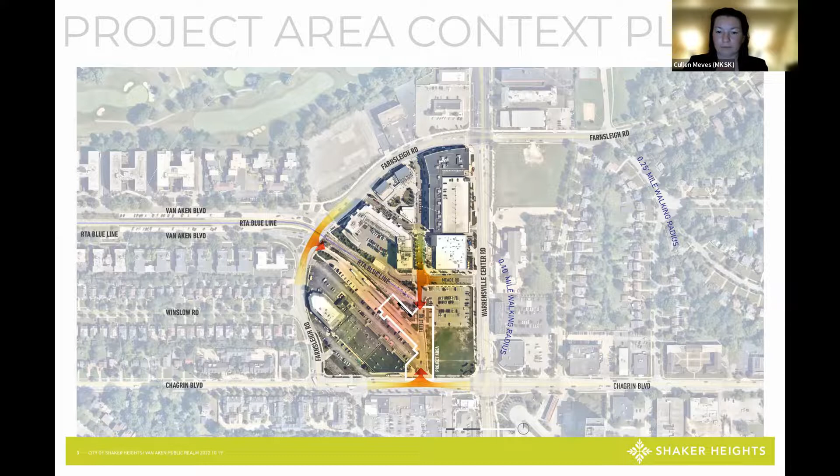So back in 2020, right at the beginning, in the middle of the pandemic, we learned pretty quickly how to use Zoom and coordinate to come up with a plan to address that, sort of as the precursor to what we're looking at today. At that time, we came up with the idea of looking at where the future development was going to be, which is off to the sides with the pinkish cast to it. And this area was divided into 7 different areas.

As we moved through with the project, we also worked very closely. Our team consisted of city employees, our consultant, as well as the owners of the Van Aken shopping area, RMS, and also RTA, of course, is a critical component of that whole area. So we really worked as a team to narrow down what we wanted to happen. And for this project, in effect, what we're looking at is the areas that are labeled as 1, 2, 3, and 4.

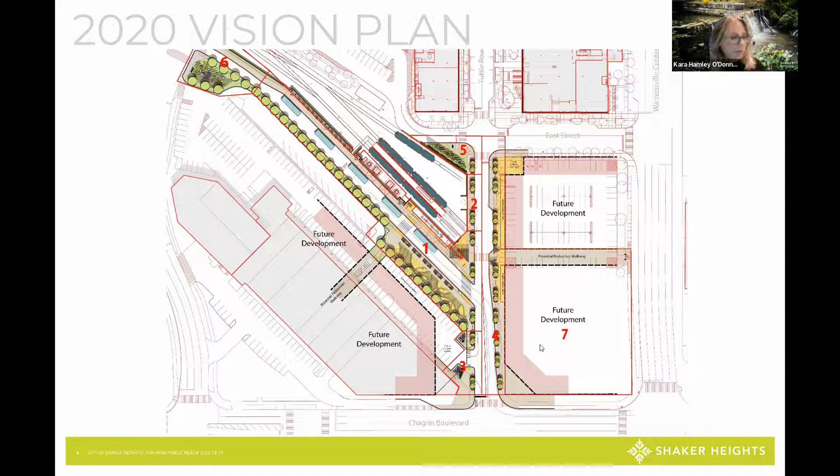Possibly 5, but mostly those core areas in the middle. And then I'm going to pass it off to Joyce to talk a little bit about the RTA project that's separate from this, but obviously very related to it.

So we did want to show you what's going on with the RTA Comfort Station. They are in final construction drawings, and that is to add a station building with a restroom at the end of the tracks, where it says Comfort Station is green. So we wanted to let you know that that project is also going on.

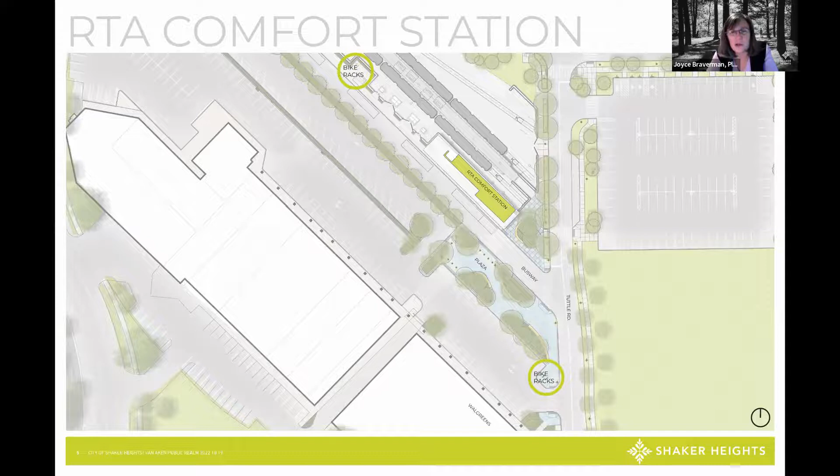RTA, as we said, are in their final construction drawings and hope to bid this by early next year, and perhaps start construction as early as March or April. The public realm construction would follow right after. So just wanted to let you know that's going on and give you a visual of what that will look like.

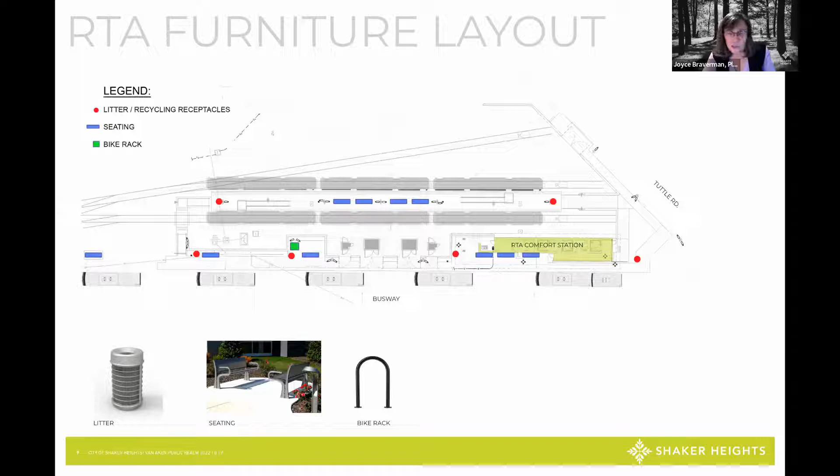Oh, and this is their furniture, just to show where you see blue, that's both the shelters with benches in them. Red is trash cans, and green is bike parking. The reason we're showing you this is we will talk about bike parking on our plaza, so we want to show you what's happening across the street.

I'm just going to give you a little bit of background. This is a $1.8 million project. Most of that is with NOACA Transportation Alternatives, which focuses on transportation alternatives that aren't a car, such as pedestrians, cyclists, and transit riders. That money is secured and ready to go.

Our timeline, as Joyce started to allude to, is that we're working on design and engineering for about the next year. Then in late next year and into early 2024, we'll be doing bidding and construction, which will take place from the spring of '24 to the spring of 2025.

And I'm going to pass it back over to MKSK to get us going on the fun part. So just to give a quick overall view of what we started with and what were some of the goals of the project as we developed the space.

This is a major hub within the district, tying together the rail, busway, and pedestrian traffic. So connectivity was a major theme of how we started to lay out the space and organize it around the desire lines that people have moving through the space, creating a multimodal district hub that really becomes the heart of that.

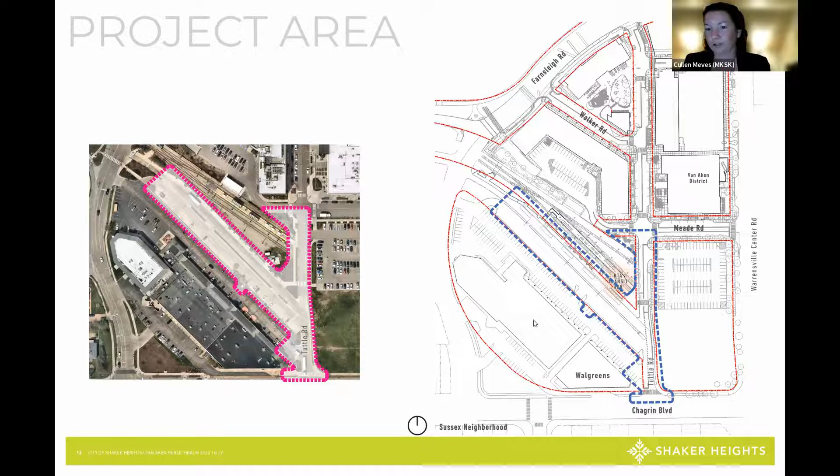As we mentioned, connectivity was a big theme for us, trying to figure out how this plaza and space could best function. We looked at various modes and circulation routes happening in and around the space, whether it be the bus and rail circulation, the bus lane with multiple routes coming in and parking along the comfort station, the rail line, and how people are disembarking and moving through the space, getting to their cars or moving through to the district, how vehicles are entering the space.

This was of particular interest to us also from a wayfinding and branding perspective, trying to create moments that will help ground this area of the district, similar to how the hubs at the northern end have done. We also looked at the circulation as it exists today within the parking lot and tried to make some improvements to that. And finally, pedestrian flows.

You can see here there's a number of crosswalks that exist today, desire lines for pedestrians moving through the space. As we were in discussions with the surrounding owners and with the city, we identified this major desire line cutting through right adjacent to the Walgreens.

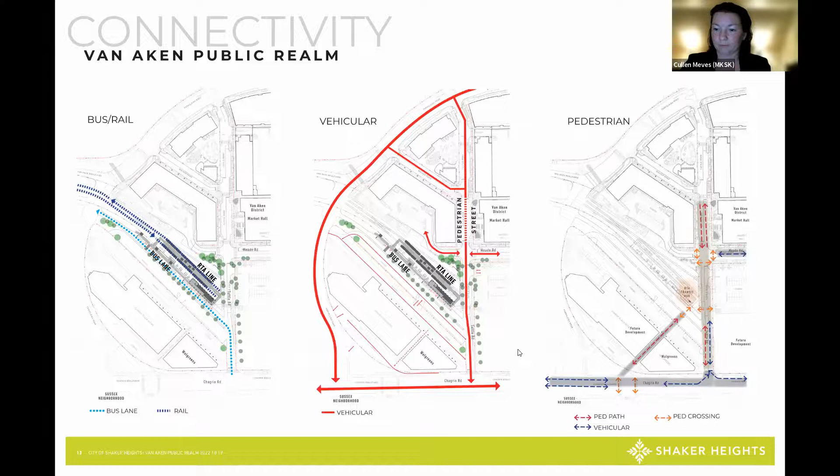And so being cognizant of that, we tried to create that connection as well. We also wanted to make sure the balance was right for the space, taking a look at the major public spaces throughout the district and creating a space that balances those but doesn't necessarily draw away from them. Each of these spaces has its own unique character and function, and similarly this one is really more tied to the transit hub and circulation aspects of the district.

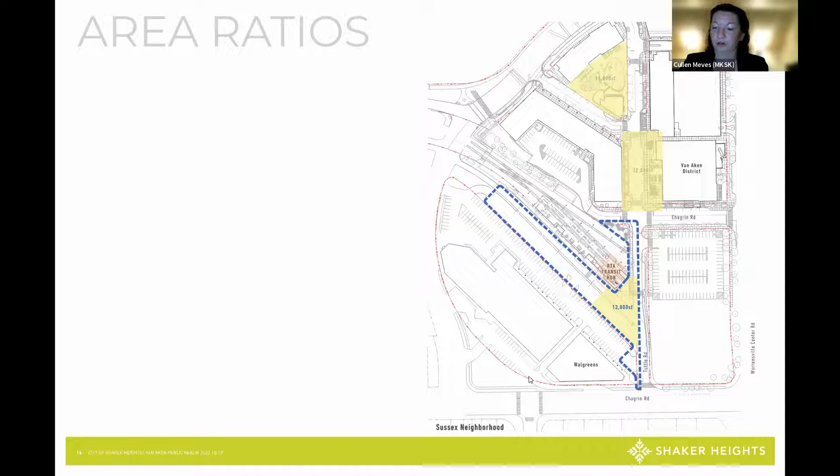And we're trying to draw that into the design and make it function from that perspective as well. As we've been moving through this process, we've had a lot of discussions trying to figure out the framework, how to lay out the space. As we mentioned, that major pedestrian connection to the Sussex neighborhood and across Chagrin is a strong desire line and cut through.

So we wanted to provide an ease of movement through the space along that corridor in particular. That kind of set up our boundary as we started to figure out the best scale for this space and how it will function. We really see it as a quieter plaza compared to the northern two, a space where people will be waiting between route stops or waiting for a bus, perhaps waiting to meet someone who's using one of the adjacent shops.

And so trying to size it appropriately for that. As we were doing that, we also started looking at maximizing the efficiency of the parking that's already there, switching what is today a two-way parking area into a one-way that gets a little more space, and changing it to angled parking so that we can have a few more parking spaces in that area as well. And then also looking at all of those other cross connections happening throughout the district.

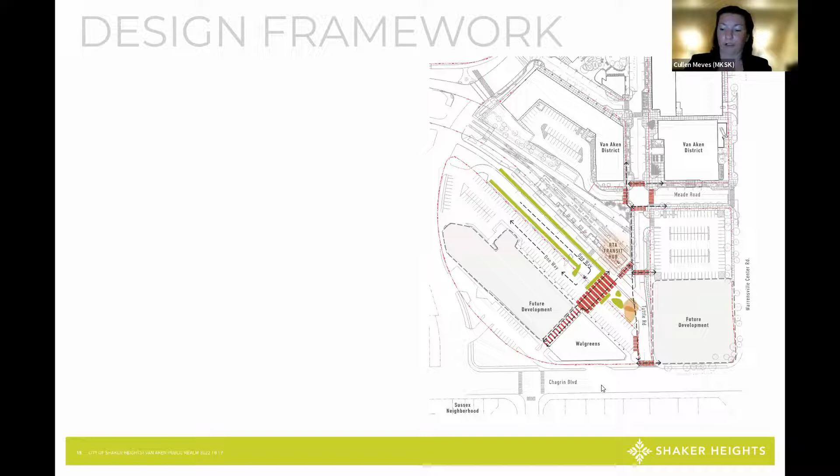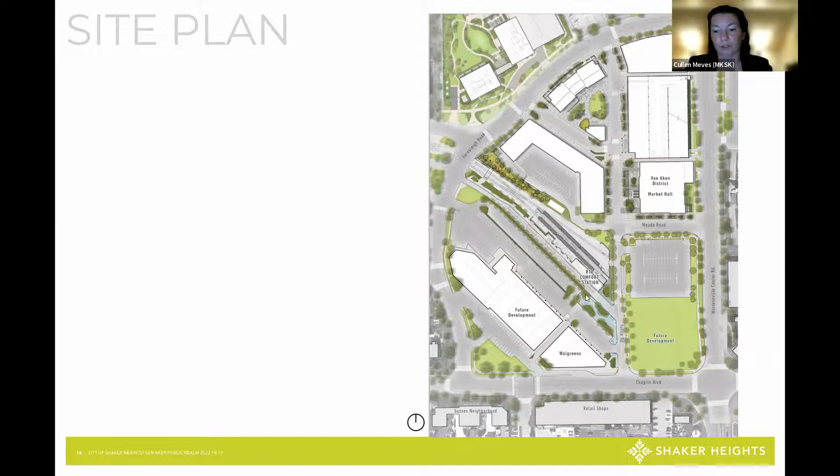So here you can see, as it stands today, the site plan for the area, and also how it ties in with the other spaces throughout and along Tuttle Road. You can see that long connection right next to Walgreens coming up and into the space. Let's zoom in a little closer so you can see some of that framework playing out in the design.

So we're showing a generous crosswalk that brings people from that primary crossing point into the plaza. We also studied paths and routes, trying to make a space that is comfortable, that creates enough shade and has enough areas for seating, and different types of places with different vantage points, but also without blocking any of those primary routes that people are trying to take.

You can also see right here that driveway that's now been switched to a one-way with the protection areas at the end right next to the crosswalk, creating protection along that side as well.

You can see over here our concept diagram of how this plaza is functioning, tying into the idea of having the artist piece as a primary component of the space. We're designing the framework for the space itself, and the artists are designing the element that's going to be proposed for this space.

So we're keeping this area in particular flexible so that they can be seamlessly melded together and not be an afterthought in terms of the space as it's designed.

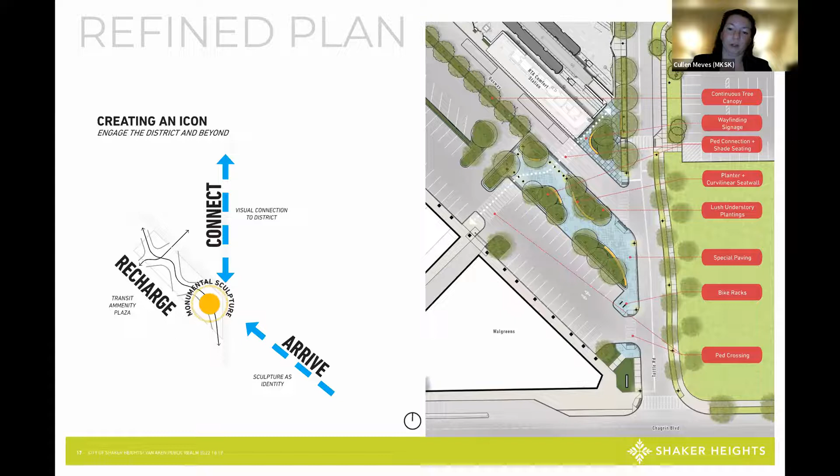Making really safe, generous crossings that buses will be cognizant of, with everyone crossing here - we're suggesting tabled crossings so it creates a very prioritized pedestrian experience. It also highlights the primary route and gets you in the most direct way onto a bus route or rail stop up to the northern part of the district.

You can see we have a number of planters to help bring down the scale of the plaza to a pedestrian scale. It's curvilinear for ease of movement throughout the space, with lush understory plantings.

And we have some specialty paving, which you'll see an example of, trying to pull in some of the character of the iconic paving up in the northern section, but give it its own flavor and make it a little bit more of a gradient here.

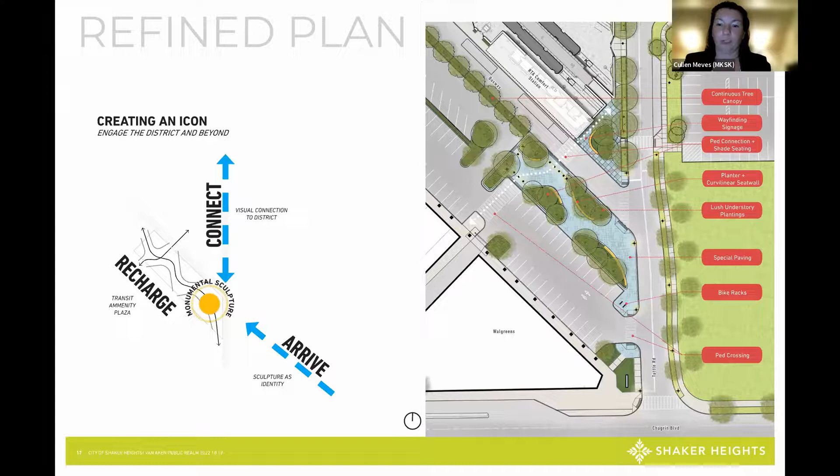And finally, as was mentioned earlier, the bike racks tie into that multimodal and connective design goals, so trying to make sure everyone has an option here within this plaza.

Some of the design elements we're proposing for this space include seating, specialty pavers, shade trees, and understory planting. We're drawing inspiration and association from the comfort station across the street.

We're trying to bring in some wood elements into the benches, also creating areas that are a little bit more comfortable, not quite so cold to sit on.

The concrete pavers are just a nice material - it gives a distinction, a feeling of it being a special plaza in space.

And as I've mentioned a couple of times now, the shade trees are really important to the comfort level in this plaza, making sure it's a nice place to be throughout the seasons.

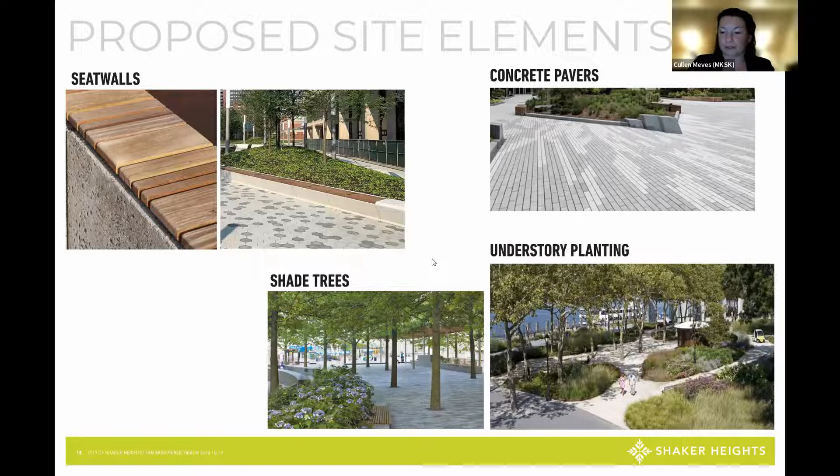Some of the other proposed site elements, and also ones that will be in close proximity - we're proposing to keep the same lighting that exists within the district, keeping that consistent character and tying everything together.

Suggestions for bollards at those crossings so we can provide wide crossings that are easy to negotiate, but also still keep cars where they need to be and people safe from vehicular zones.

And then bike racks as kind of the standard for the district itself, and the RTA's fixtures that will be across the street. You can see that here, the benches and the trash can that's shown in the previous plan.

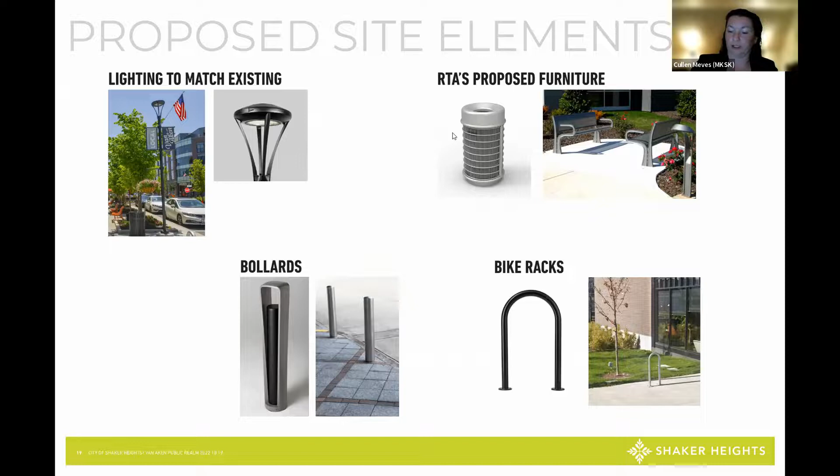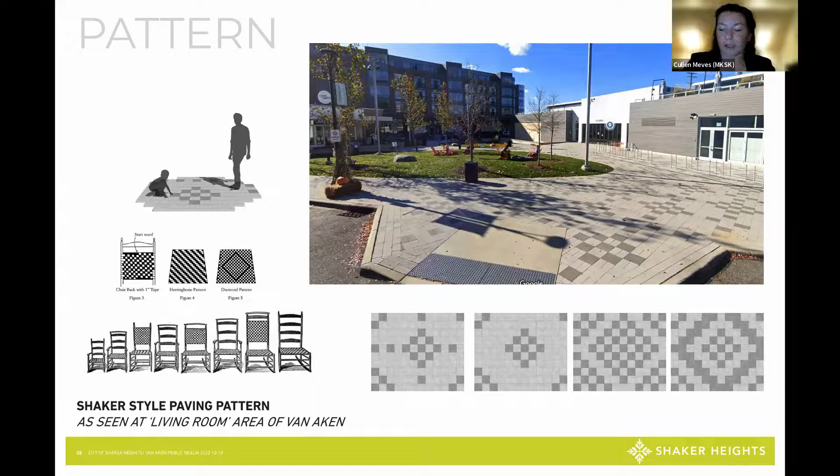And as I alluded to, the specialty paving happening up in the center of the district - we want to keep that area special, that is iconic. So the proposal here is to use a kind of broken down version of it, make it into more of a gradient form, have a sense of energy as you move through the space. So it ties together, but keeps this area the central socializing space and its identity that way.

Some other elements we're considering or planning for in this space, so that it can be flexible, are mobility elements—either bike stations for bike shares that may be located in this area in the future, and also wayfinding signage that may be associated with RTA. So some other elements we're considering as we're moving forward.

Also some suggestions of potentially having thermoplastic or colorful treatments on the crosswalks—really eye-catching or iconic elements that can be added at any of the crossings as they exist, but tend to be used more for gateways.

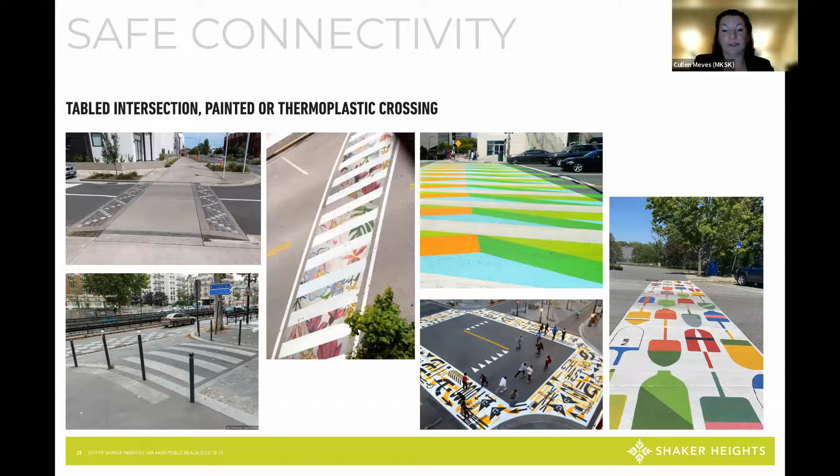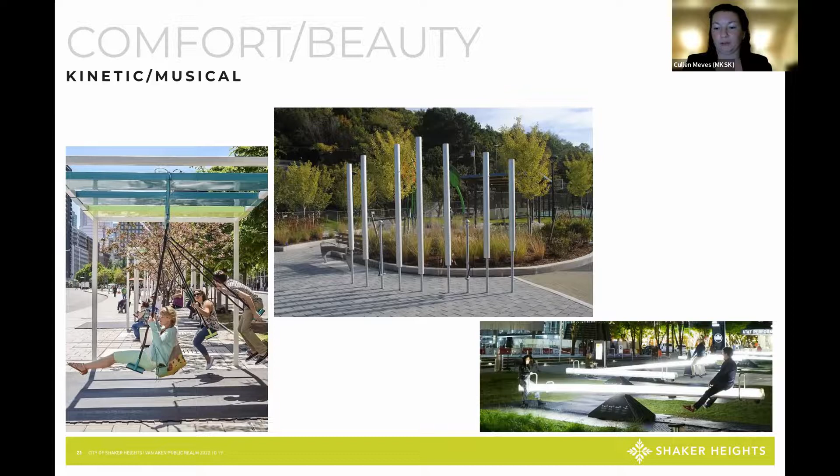And so, sure, go ahead.

Thanks, Cullen. This is a preliminary design that was vetted just last night by our public art task force. The artists chosen through our public art task force several months ago are a group called Kravanek and Bro, and they came up with multiple general schematic ideas for the artwork, which last night our public art task force unanimously preferred this concept. Throughout the process in the last couple months and going forward, MKSK and Kravanek and Bro will continue to work together, as Cullen noted, to make sure these are seamlessly integrated into the design and that this can be a real anchor in that public area. We're excited about it, and I think MKSK and Kravanek and Bro have been a great partnership—their creativity together. We're really looking forward to seeing what becomes of this. I'll hand it back to you, Cullen.

So this is exactly that kind of target that we had on our previous diagram—this is the placeholder we were referencing. So creating a space for something vibrant and exciting that helps people understand when they've arrived at the district, creating a branding moment as well.

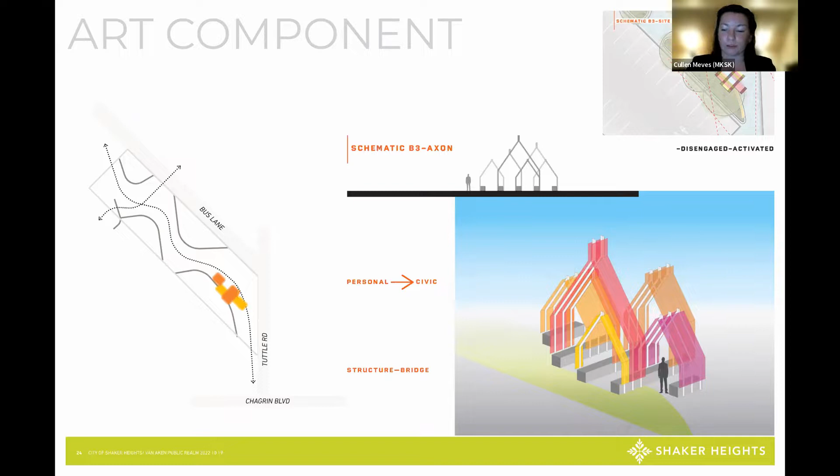So some of the other functional aspects of the space—as we're moving through the design, you can see here where it's falling within the existing parking layout. We mentioned we've been able to increase the efficiency of this parking area, and by doing so we've added 11 spaces in total. We were taking away 10, so we've actually gained space from the area that's still available. Obviously there are spaces that have been removed as well, but that was always part of the plan for the plaza.

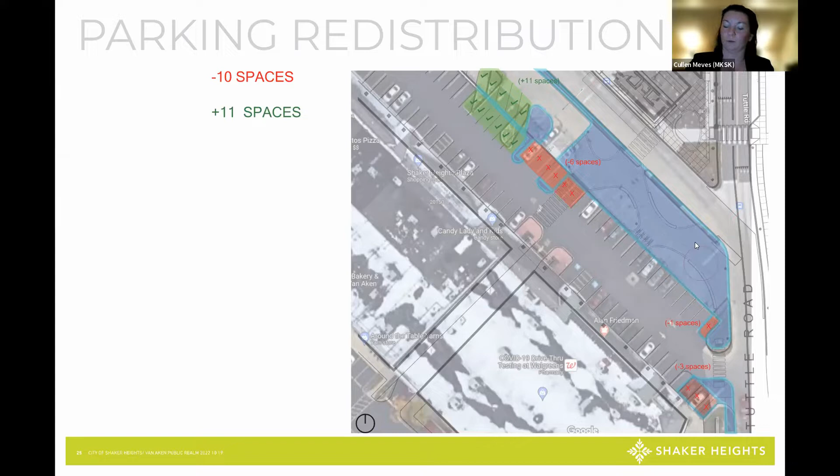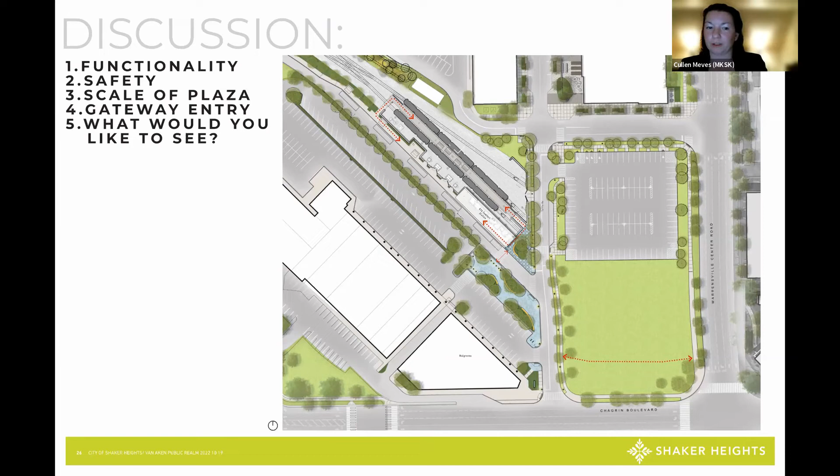And so with that, I want to kick it off into discussion with a couple of topics. Generally, we'd like to hear your thoughts and impressions regarding functionality of the space. Do we have the desire lines understood correctly? Are there ones we're missing? How do you see the space functioning? How do you see people moving through it? We'd love to hear your thoughts on safety and the scale of the plaza—how does that feel, how do you see people using it, how is the gateway function of it coming together? And also, what else would you like to see?